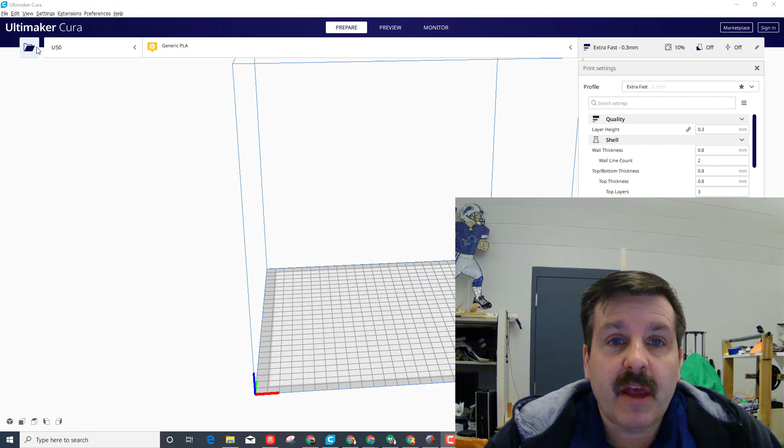I've been using Cura forever, with my Ender 3, Delta Go, all kinds of printers. If you are adding a printer, you simply click this button, choose Add a Printer, and then if you do non-networked, you can scroll down and actually find some printers from the company. If I scroll down far enough, I'll find Creality 3D, and I can launch the Ender 3, and bring it in. It has all kinds of settings built in, and it's ready to go.

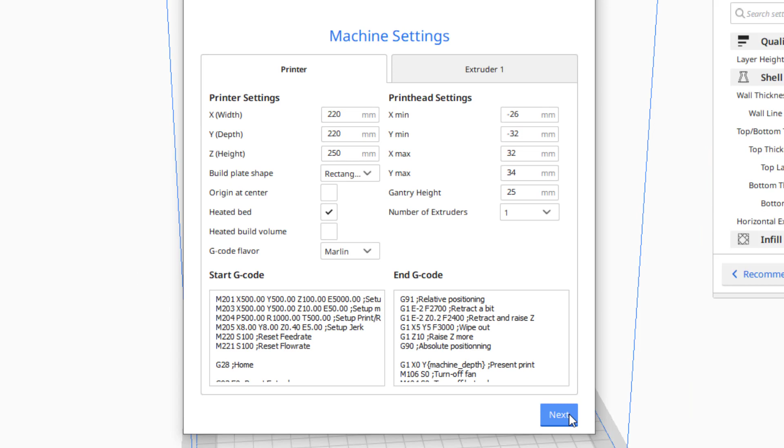I'm just going to click Next on this button, but then I'm also going to add it a second way. So I'm going to do Add Printer, still non-networked. This time I'm going to choose Custom, and instead of Custom FFF, I'm going to put My Ender 3. All I do with this custom one is simply change the settings.

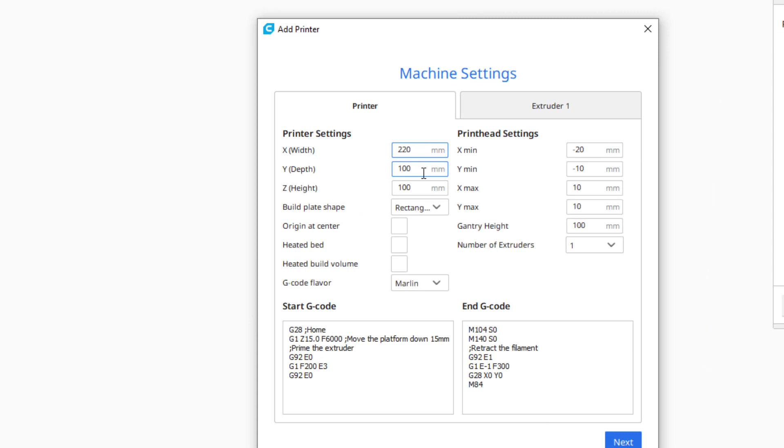So it's 220, 220, 250. And then I like the extruder, you have to always change that setting to 1.75 because we use different filament than Ultimaker uses. I'm going to tell it next, and then I want to show you why I did this.

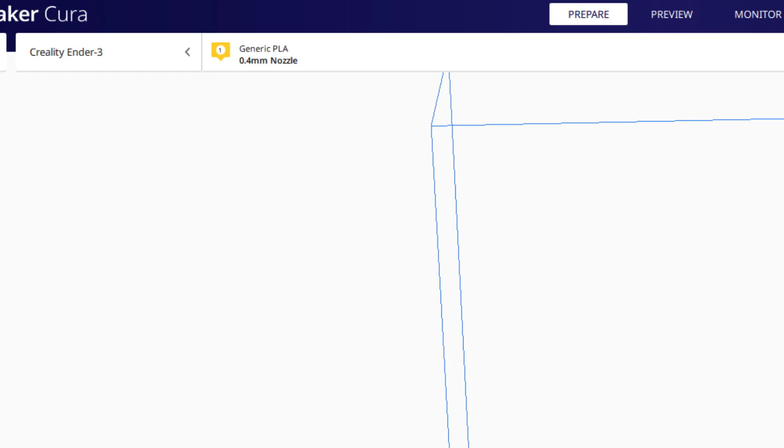If we hit Creality Ender 3, this is their profile. It's got a 0.4 millimeter nozzle. I'm doing PLA. Instead of standard, I want a custom quality. It comes with a 0.28 millimeter quality. I want to instead do 0.3, so I'm going to change that number to 0.3.

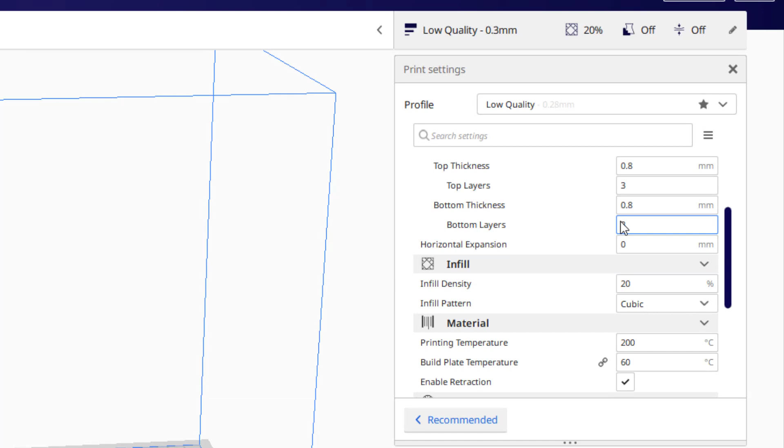I'm going to keep 0.8, 2. I'm going to change this to 0.8, and it'll wrap to 0.8 for both. My bottom layers are 3, that's fine. I'm going to change my infill to 10% because I'm always in a hurry. I'm going to switch to grid because that's what I use on the other one. I'm going to keep the 200 and I'm going to keep the 60.

And I'm going to do 60%. And then finally, when I move down to build plate adhesion, I want to skirt 3 lines 10 millimeters apart. So this is the setting I like. I'm going to click this little down arrow and I'm going to save this.

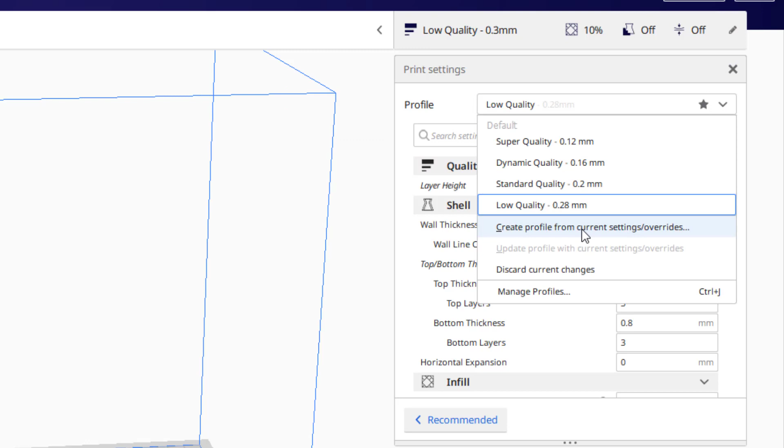So I'm going to create a profile for that called My Ender 3, 0.3mm. So I've got it stored with all my settings I like.

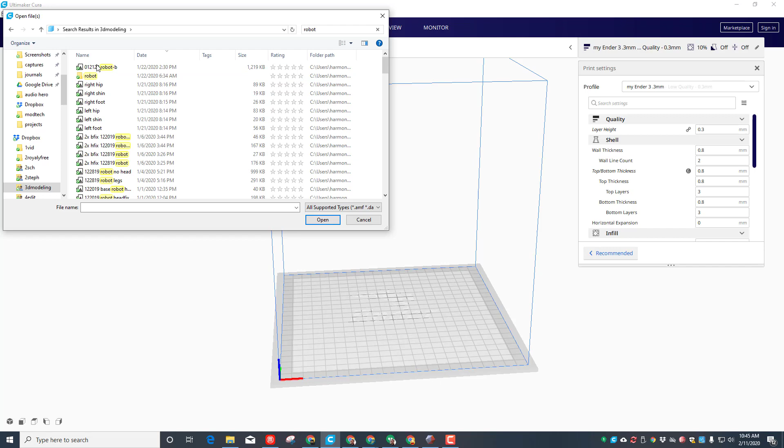We go through all of that so that I can show you this little project. I have got this little robot that I've created that I enjoy printing. When I bring him in, he says HLModTech. He says get cracking on the back. And then here's the part that I've always been proud of: I've had him printing for years in 1 hour.

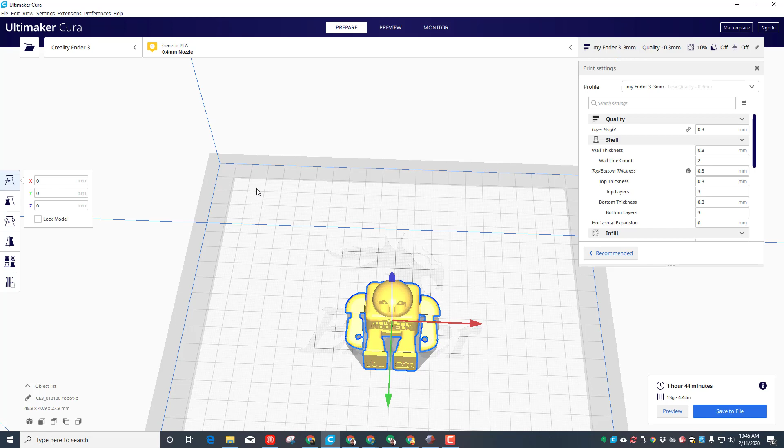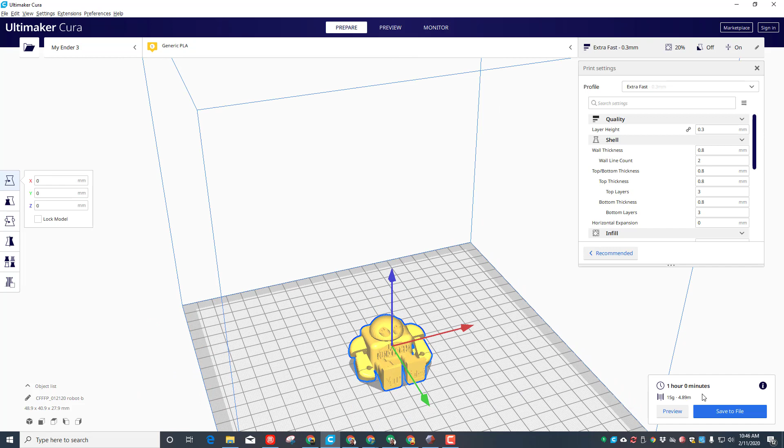But check it out, with the Creality settings, it's 1 hour and 44 - that's an extra 44 minutes. So I was confused because all of a sudden this happened after I put in a new computer and brought in Cura again. Well, check this out: if I switch to My Ender 3 and then change the settings to the extra fast 0.3, it does its little software slicing, and just like that, my friends, it goes down to 1 hour. I've printed this many times, and it comes out really slick.

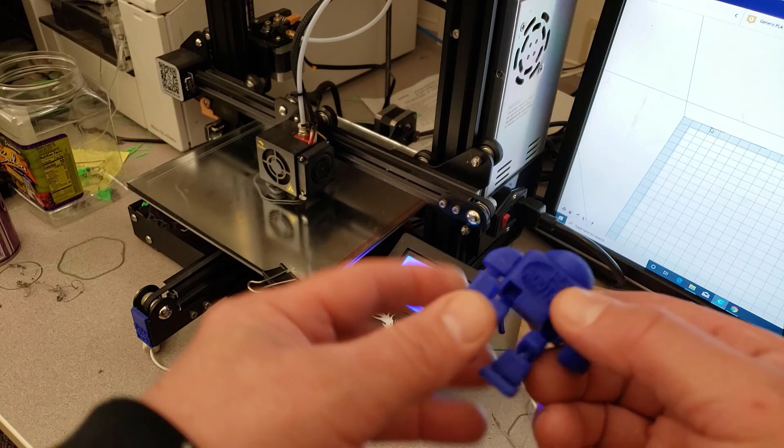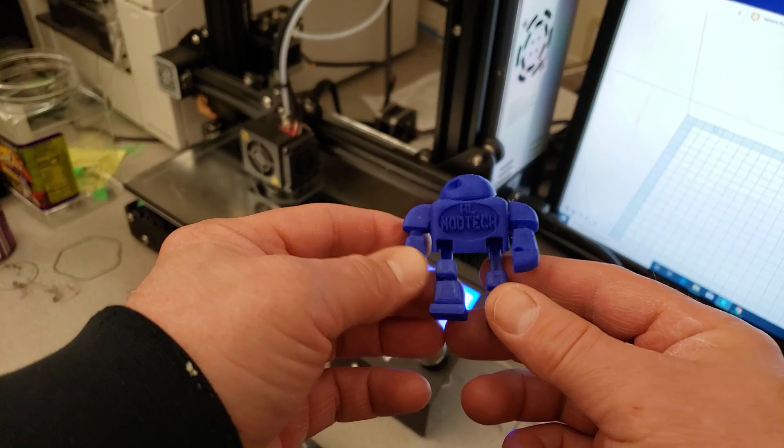Alrighty friends, so right here you have the Ender 3 actually printing another one as we speak. This is a version from before I changed the filament from blue to silver. You can see it moves in every direction the head prints, and on the back it has the awesome little get cracking phrase from the YouTube channel. Fun, and like we said, prints in 1 hour instead of 1 hour and 44. I don't know about you, but anytime I can save 40 minutes of printing time, that is a win.